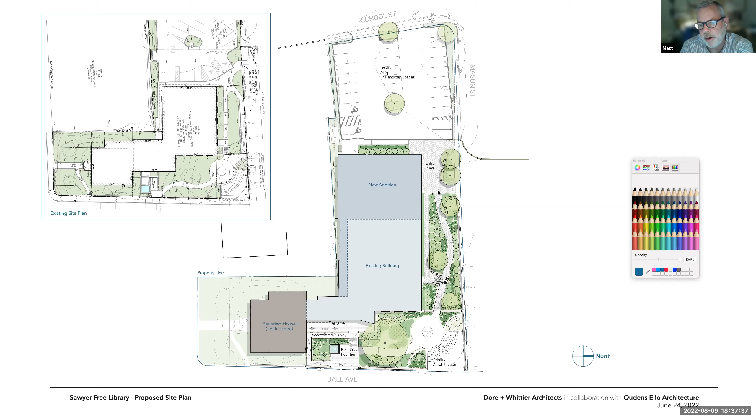What we're proposing is that we pick up this winding path that takes you from the plaza down to the amphitheater, through the north garden and sloping down. Now that we have more length to work with, we can make that an accessible walkway without guardrails down to an entry plaza at the lower level, which serves the lower entry.

Moving into the plans, as you all know, this is a 3-story building built into a sloped site. Existing plans are up in the left-hand corner, proposed plans are the larger plans on the screen. Saunders House is shaded gray because it's not part of this project. The line on the right shows where the end of the existing building is, so this is all new addition to the west. This is the existing footprint of the current building.

The way the program is distributed through the building, we have community program and staff primarily down at this level. That includes an entrance from parking, a covered entrance from parking to a lower lobby, a community meeting room of about 110 seats, flexible space with stacked chairs so you could put them away, put out tables, reconfigure the room. We have an operable partition which will allow it to divide into 2 separate program rooms.

Facilities appropriately sized for the library and for that function.

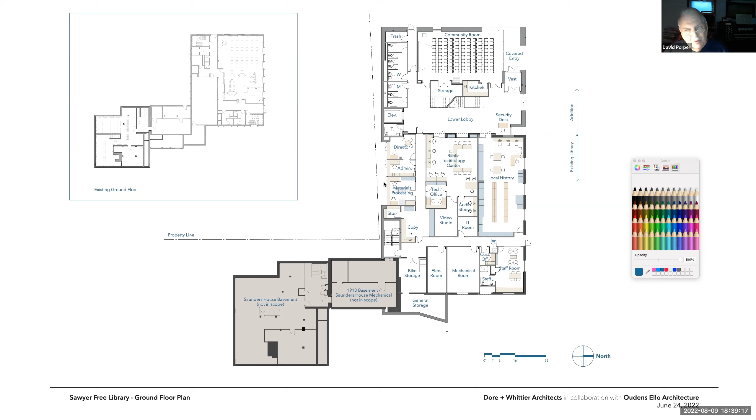Staff space, we don't have to go through much about that since we have no jurisdiction over the inside. Got it, okay, thank you. If you talk about the inside because of something that's going to happen outside, that makes sense. But otherwise we don't need to know about what goes on inside. Understood, thanks for the clarification.

I'll go a little more quickly through the plans. I do think it's important to note that this shaded blue area is intended to be accessed off hours, so we can close down the entire library with the exception of this lower level. That means the community room, lower lobby, and restrooms and support spaces can all be accessed off hours when the library is closed. It builds in flexibility in terms of how the community can use this building.

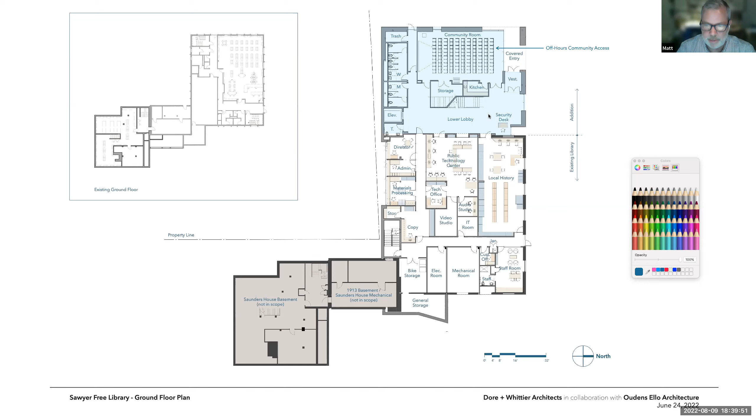This is the main level, the Dale Avenue entrance. As I mentioned, there's now a straight entrance in from Dale Avenue, straight up the steps to a covered porch and straight into the building. The existing condition is more meandering: up steps, into a porch, turn right into a vestibule, turn left to get into the library. So this is a more clear, direct entry from Dale Avenue. We've also opened up the corner so that it's more visible.

The 1913 wing, which was a stack wing added to the Saunders House, is converted to a gallery. We're relocating the gallery that was at the entrance into this space for an expanded gallery area, continuing to use that as a connector between the library and Saunders House.

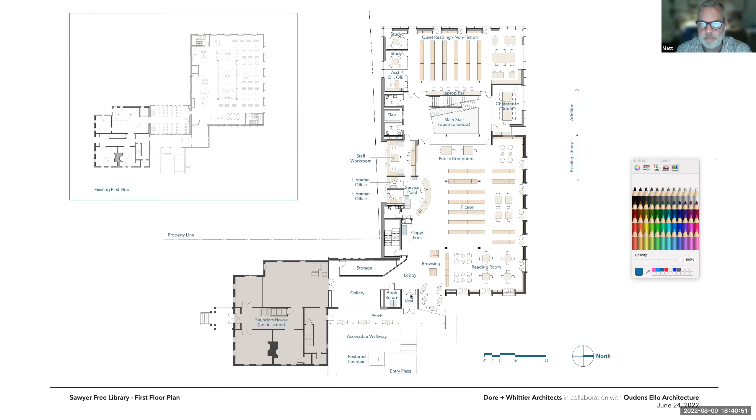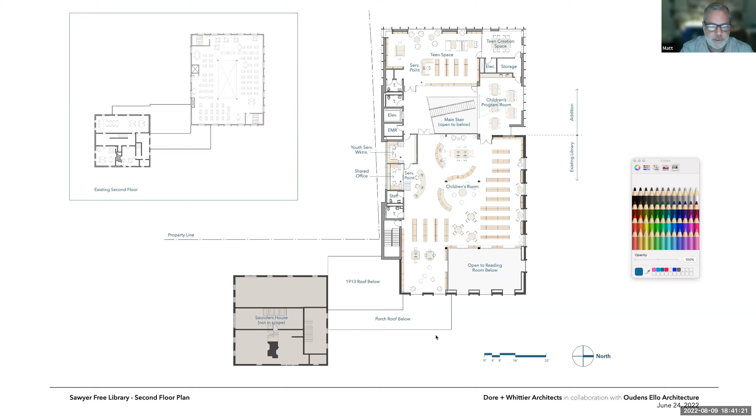This floor is where all of the adult collection and adult programs are, and then there's a third floor which houses the children's room and the teen space. One thing to note is that we've filled in the central hole in the top floor plate, and we've opened up the floor plate at the corner. We've eliminated the 2 fire stairs, so we've made great efforts to make the front of the building more open and visible from the street, and from the library out to the street, in keeping with the importance of this as an important public building.

This is the roof. The lighter blue is the existing roof, so we're maintaining the existing hipped roof of the Manel building. This is the roof of the 1913 wing. We are putting on a new porch, which you'll see in the elevations. And this is the footprint of the addition. It's a flat roof, and we are planning on solar panels wherever we can manage to get them. We have some rooftop equipment, and there's a light monitor over the central atrium which brings in natural light.

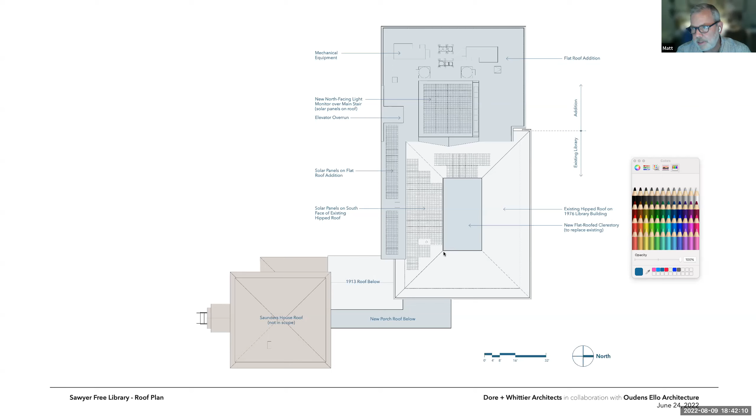In terms of the Manel roof, the one modification we're making is replacing the existing lantern with a new lantern that has more glass in it, so that it actually brings more natural light into the building.

So now we can take a look at some exterior views. This is pairing a proposed view with the existing view, showing the view from Dale Avenue. I'll point out what I was just mentioning: the light monitor on the Manel building is now replaced. It's the same height, but instead of a hipped roof, it has a flat roof, which allows us to increase the amount of glass and get more natural light into the building.

One of the things we're trying to do is bring in as much natural light as we can to reduce the dependency on artificial lighting. As you can see, we're maintaining the 1913 building. We are opening up the front of it with a larger glazed opening, replacing the windows that were in between the stacks. We are extending the porch all the way across the building, and we're opening up what was a more solid brick corner in the 1976 building with more glass, to make that entrance more open, more welcoming, and more clear in terms of patron wayfinding.

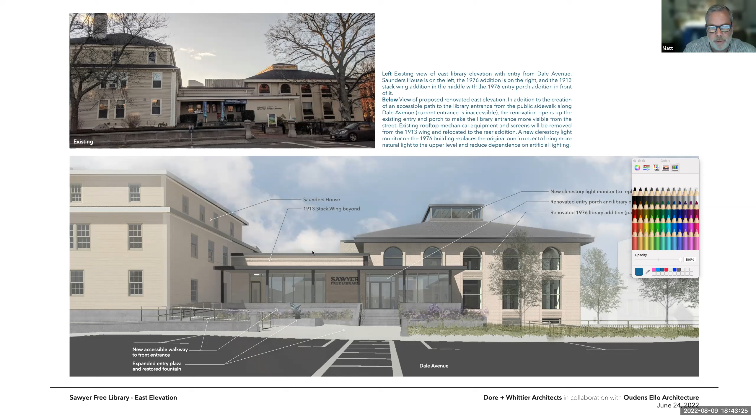One last thing to point out about this view is that we've made efforts to get rid of all the mechanical equipment that's currently sitting on top of the 1913 wing, which you can see in the photograph, plus this screen that you see here. So we've eliminated that and moved it to the back of the building, getting it away from this more important view and putting it on the flat roof of the addition.

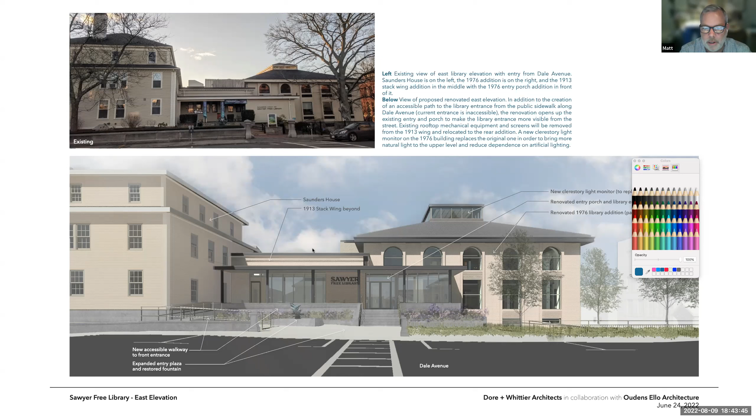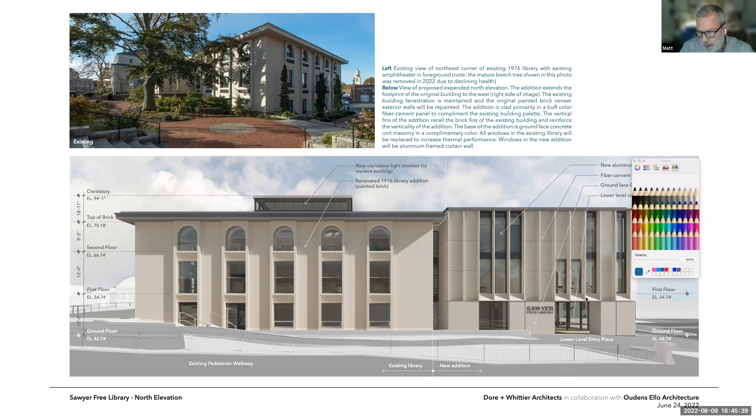In terms of the addition, it's again 3 stories. The materials are a combination of ground face CMU at the base, intended to pick up the masonry scale of the painted brick in the Manel building. The upper 2 stories are a fiber-cement panel that uses this expressed vertical fin, picking up the vertical language of the projected brick fins on the Manel building, but reinterpreted in a new way, creating a comparable scale with stacked openings and a kind of cadence around the facade similar to the Manel building, but reinterpreted for the new addition. You can see here the covered entry from the lower level entry plaza.

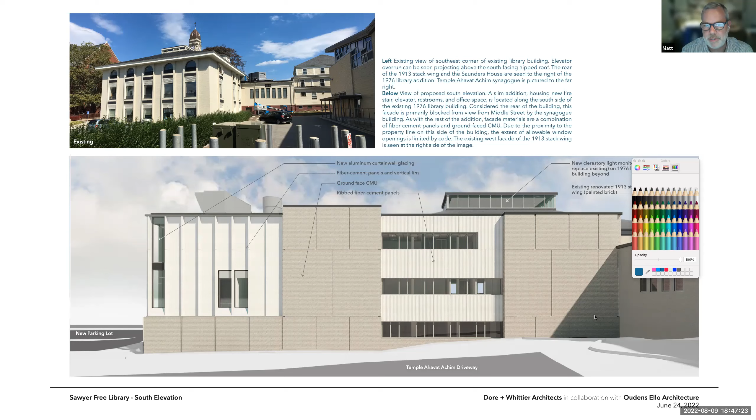The reason the facade on this side is predominantly blank is for 2 reasons. One, it houses a new elevator, fire stairs, bathrooms, etc. A lot of the things making this building work are located along this side. The other thing is, because of its proximity to the property line, we're extremely limited in terms of the number of openings we can have based on code. So we're restricted in openings, and we have a lot of solid elements on this side, and that's part of why it has a different character than the other sides, where we're trying to maintain as much glass, transparency, visibility, and natural light as we could.

Just a quick note about the materials. Again, the base of the building is intended to be ground face CMU. We're looking at a light colored CMU that would be compatible with the painted brick on the Manel building. The upper portion is the material you see at the bottom of the screen, a fiber cement panel. We're looking at a combination of smooth and this corrugated panel you see in the middle, in a buff color that picks up the general tone of the existing building.

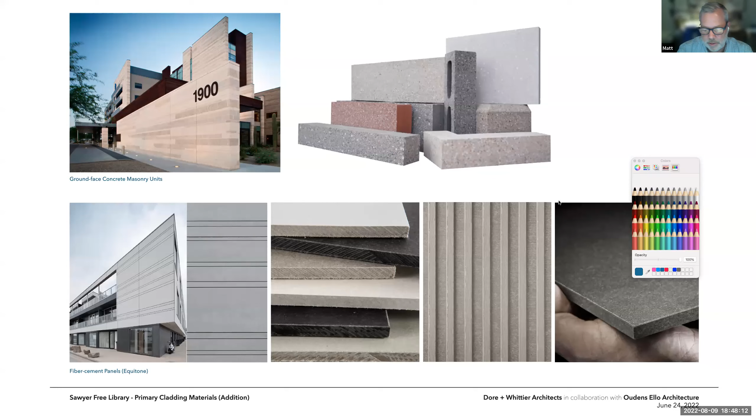We've pretty much seen what we need to see. Members, do you have any particular questions about one of the views that were shown that you'd like to see again?

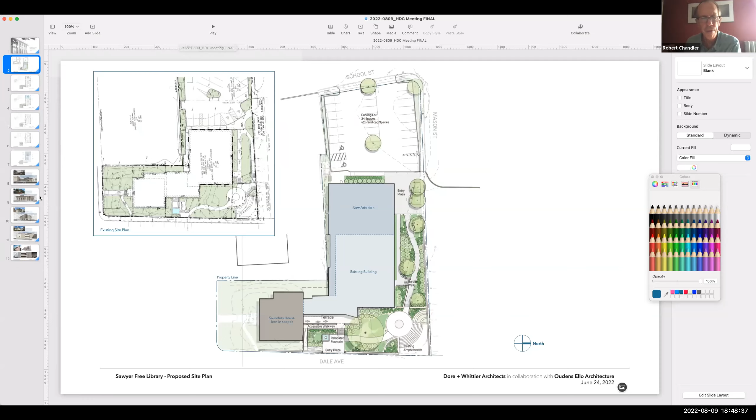Or, Matt, could you put the Dale Ave facade or elevation up? That's the most emblematic.

Thanks, I think it's really very nice. I think I do too. It's really improving and maintaining the inherent characteristics of the Manel building, but improving it in ways that will make it a much better building, and a much more open, effective public face of the library to the city.

Yeah, I agree with you, Rob. I think you've done a great job. Thank you. David? Any other comments?

David, yes, it's Ollie. Could you bring up the back, what you call the back side of the building? Yes, along that side, if you look at the top small picture, you'll see that there are 3 Monell windows that are being eliminated. And that's what we see primarily from the temple.

They consider it their backside, and that side of our building is what is used most. That's the door that's used most, it's the entryway that's used most, and we have most activities that are outdoors, which we have a lot of in that area. So we're losing some architectural detail, 3 Monell windows to be exact, 2 on the right side and 1 on the left side. But it's being, the building that's being extended out.

It would be nice to actually have 4 Monell type frames of windows put back in the design. They don't necessarily have to be fully functional from my perspective. If you go over and look at the Cape Ann Museum and see their Monell windows, they have them blocked pretty much for exhibit purposes in various galleries. So it wouldn't necessarily have to be a fully functioning glass window. It could be a framed, faux window, if you want to call it that, of the Monell design put back in, and have the image of the glass and whatnot in place.

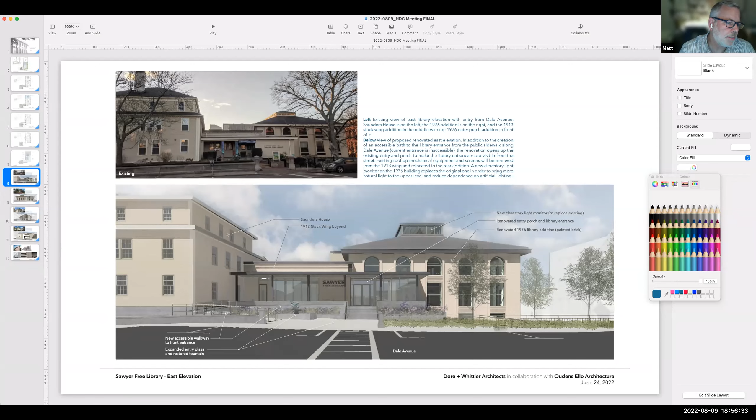In terms of the south facade, this is something we're continuing to study, and I think there's perhaps a little room for modification. However, looking at the site plan again, you can see the property line here on the left and our building footprint here. We've added a small amount, but that bit of footprint does quite a bit for us in terms of accommodating the elevator, fire stair, bathrooms, etc. The reason we're building there is that the main priority was to maintain two facades—the Dale Avenue facade and this north facade. We expanded as far west as we could; any further expansion would have limited the parking lot. We're already about as tight as we can get, and we've reached a point where we have support from the city and from the MBLC.

But any further expansion west would really put the parking lot in jeopardy, so we feel there's really no alternative but to have this bit of expansion on the south side. We're at the closest point here, at the intersection between the property line along the west side of Saunders House and the south property line of this larger parcel. It angles away from the building, so by the time you get to this end we're further away than we are here. We've stepped the building in here to allow us to get more fenestration in that area.

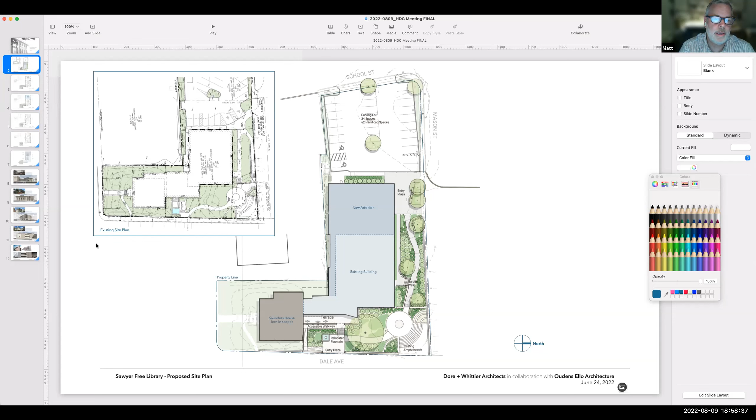I think increasing the number of windows is probably not a realistic expectation, but we can look at the deployment of those windows. Currently they're organized in a kind of continuous ribbon in this central portion. We can look at recalibrating that so we're doing stacked windows in a way that's more appealing.

In terms of replicating the arched windows, we generally work with a lot of historic properties and try to adhere to the Secretary of Interior standards, which say you need to make a clear distinction between a historic artifact and a new addition. So trying to create an arched window motif on something that's clearly a different building from a different time doesn't, to us as designers, feel quite like the right thing.

This addition, I don't think, will limit the activities that the temple has in the rear of their property. It doesn't encroach on their property and shouldn't limit that in any way. In fact, I wonder if this could provide a canvas for the temple that might be useful for projected images or that type of thing.

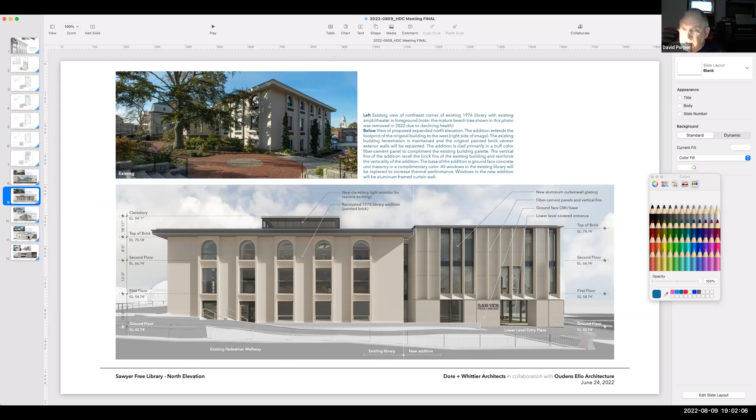Thanks everyone, would you mind going back to that view that faces the temple? Thanks. I think that sounds like a nice idea, looking at the concept that you have wrapping around the whole addition. And I've seen the work you guys have on your website, I know you do beautiful buildings. I'm sure there's a solution that can be applied to this facade. I think the idea of looking at that central window piece and how that connects is nice.

I also just think these are very large, tall, big CMU walls that are going to be right up against the property line. So while you're correct that it doesn't impede the actual space, it's not coming over onto the temple property in terms of the actual square footage that we have back there, that doesn't change, but the feel of it really does change with these large CMU, like monolithic facades. It really doesn't have the same character and feel as it does currently.

And I agree with you about not replicating historic features of the existing building, but I just think that there's maybe more that can be done on this facade, not only in terms of that central window piece, but also in terms of the two very monolithic facades as well.

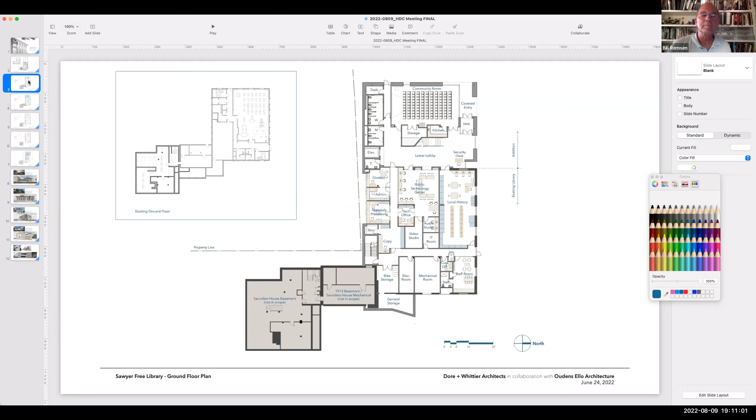Okay, great. Okay, now here's my question to you. There is a door from the 1913 basement that goes out into this walkway, which goes from the 1913 basement down to the parking lot. And that doorway, a steel doorway, is how you get into the mechanical space in the 1913 basement, which is where the boiler and hot water heater and stuff is for Saunders House. The only other way to get there, as far as I know—well, let's just say that's the practical way to get to the mechanical space. And I'm concerned that deleting that doorway will possibly cause a problem.

And in your 2019 design, you had quite a different arrangement of the mechanical room from the new library, which was up against the 1913 basement, and there was a way to get through from one to the other. Also, the fire stair went out directly onto the sidewalk there, the walkway. It seems to me that by pushing into the walkway, you've eliminated the access to the basement of the 1913 wing, and also made it so—where does the person who comes down this fire stair go to get out in case the building's on fire?

Bill, the door isn't actually showing up in this plan, but I believe the plan is that there's a door, with a few steps up to it at this end, so there's a way to egress out onto the library property. It doesn't show up here. Let me see if it shows up on the first floor plan. It doesn't. I believe the intent was that a couple of steps up would get you to a door, so we would still exit here.

In terms of the 1913 wing, you mentioned the 2019 plan. At that time it had been our intention to remove the 1913 wing altogether, including the basement, and reconfigure this whole area. We've since moved away from that, and the decision was made to keep the 1913 building to the greatest extent possible, so we're now living with that existing condition.

There is currently a way to get into that basement from inside the Saunders house. The Saunders house, including the basement of the 1913 wing which houses the Saunders house mechanical, is not in our scope and is going to be renovated under a different project by a different architect. If there are any access issues, I'd think that could be addressed as part of that renovation project. But the intention is not to have a connection between the library building and the basement of the 1913 wing, which is at a different level than the lower floor of the library.

I understand what you're saying, but I still think you're eliminating a potential fire exit from the 1913 part, and also the service access. I also think the emergency exit from that fire stair, instead of exiting onto a sidewalk, would be exiting onto a grassy hill going uphill away from the door. I'm not sure how that would be received by the fire marshal.

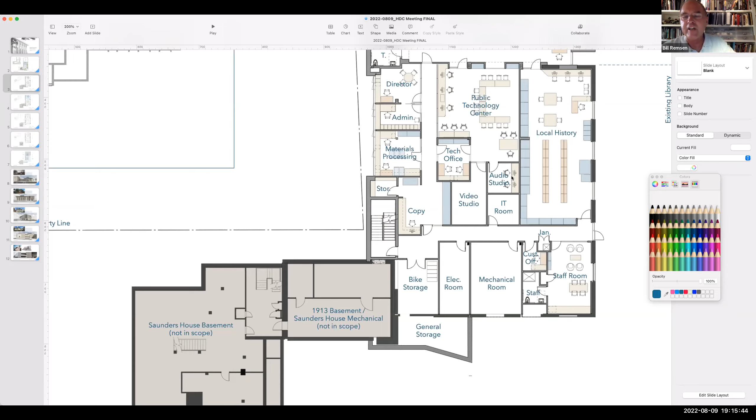Bill, are these things really in the Historic District Commission's purview? I know you're leading up to something else, but I think this is an aesthetic exterior issue because we're potentially changing the outside, and it's also changing the function of the adjacent part of the library, the Saunders house. So I think it's appropriate to consider that what we're really talking about is the southern extension of the building, and what the impact of that is in terms of not only egress and fire safety, but also aesthetics, as people have already mentioned.

I do have a couple of other questions about the materials you're proposing. Why not use brick instead of concrete block?

Well, we actually looked at brick. The switch to concrete block was partly made as a value decision, frankly. A number of years have passed since we started this project, and construction isn't getting any less expensive. With every year that goes by, we're facing escalation, and we've been trying to combat that in a way that doesn't compromise the scope of the project. So we've made some value decisions all through the project — that was one. That's why we switched from brick to CMU; it was a little bit less expensive.

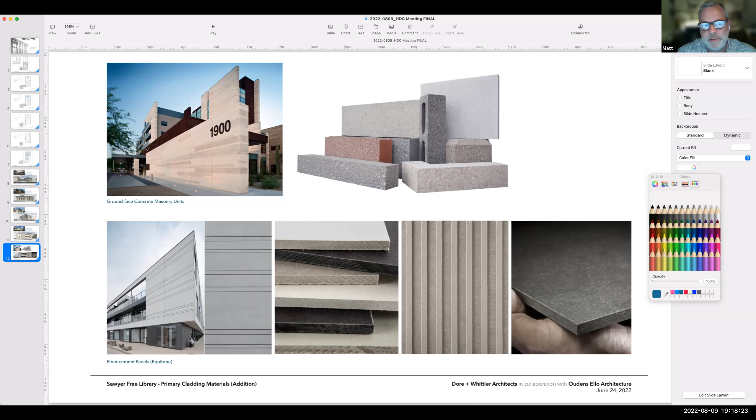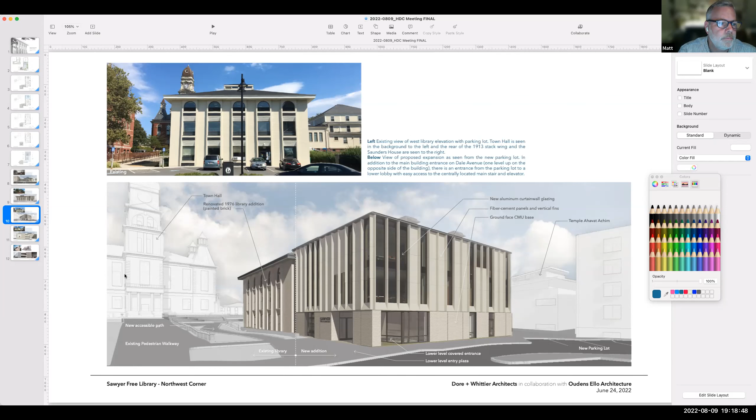Bill, this is a ground face CMU building. Now, granted, I'm not saying this is the type of building we're proposing, but I think it comes down to how it's used. Yes, it's used on a lot of firehouses and mediocre public buildings, but it can be used well and be a handsome material if handled properly. We're panelizing it to create reveals — we'll actually have a shadow line there that you can see in this elevation, and I think it shows up here as well. So the way we're handling that material is a bit different than what you're thinking about. Yes, I would hope.

Can you hold up that facade there, the north elevation? You don't happen to have your 2019 elevation in hand, do you? I don't have it available right now.

I do suggest people look at it. That elevation seemed a lot nicer.

There's a technical term, but to me, aesthetically, your addition had a masonry base, and the floor lines were identified, and the eave and soffit line were identified, and mostly it was a glass box that went on the west side of the building. I thought that aesthetically that was a good decision, and it seems you've backed off from that, and I suspect for financial reasons, because it was probably more expensive.

No, it wasn't financial, Bill. It was actually, as we got into the development of the project and the design, there were certain realities we had to deal with. One was structural—we needed some shear in that addition.

So we needed some solid exterior walls. We also, when we got into the reality of laying out the program more carefully and doing shelving counts, we needed more perimeter shelving. We had program that needed to be on an exterior wall that did not really want windows. And so, based on those kinds of developments in the natural course of the design, we had to move away from what was really just a diagram of an all-glass box sitting on a base.

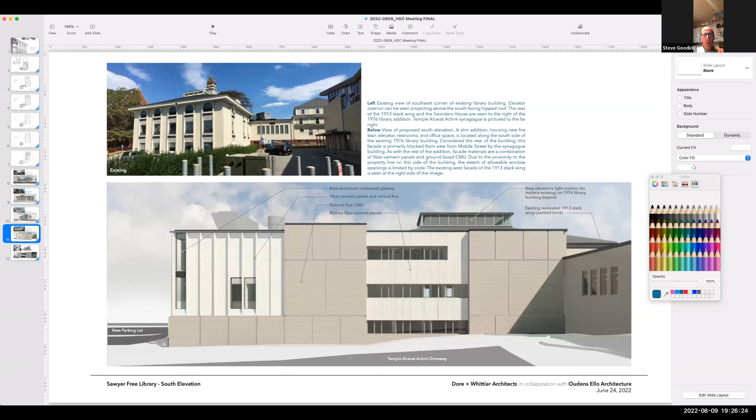Hey Arlie, can I ask you a question? Arlie, yes, can you hear me okay? Yes, Steve. Okay, can I ask a question? Are you and your group at the temple, for lack of a better term, offended by both flat monolithic walls? Or could you live with the one on the left if the one on the right was turned back into more of a panel look?

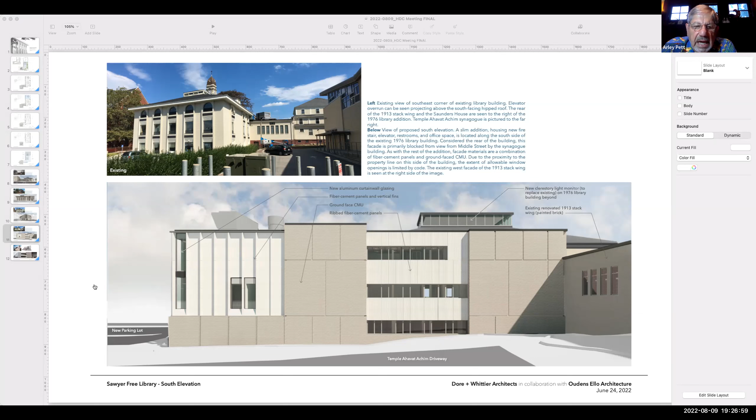So would a possible compromise be if the Manel building was to maintain more of its original look, and the new addition was to be separate from the Manel building? Would that be something your organization might consider? Yeah, that would be an improvement.

I'm speaking more from myself and what I've been concerned about. What I'm saying is that I can see you could reframe the Monel style windows where the two gray panels are on this side. You could put the two back on the east side, just framing it, and you can put faux windows by putting something behind the glass so it looks like a real window. Then you could put two there, and if you go on the west side, which is part of the new extension, there'd be room to put two more there. We get one now; two more I think would help balance it out a lot better.

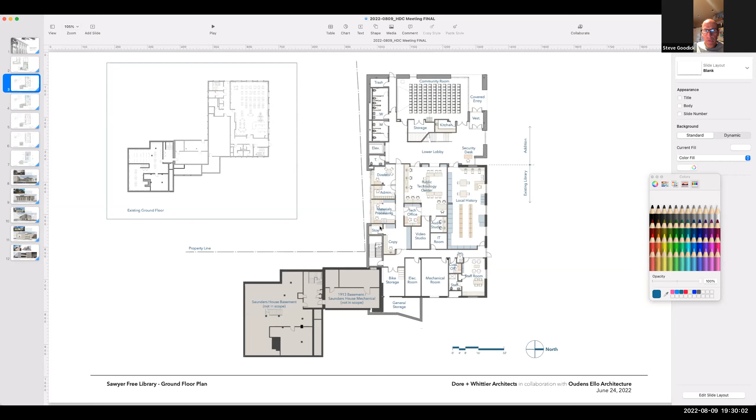On this floor, it is a storage room. On the next floor, it's a bathroom for the staff. And on the upper floor, it's the family restroom for the children's room. Okay, so it's a bathroom on 2 levels, and a storage room in the basement because we didn't need a bathroom there. Got it, okay.

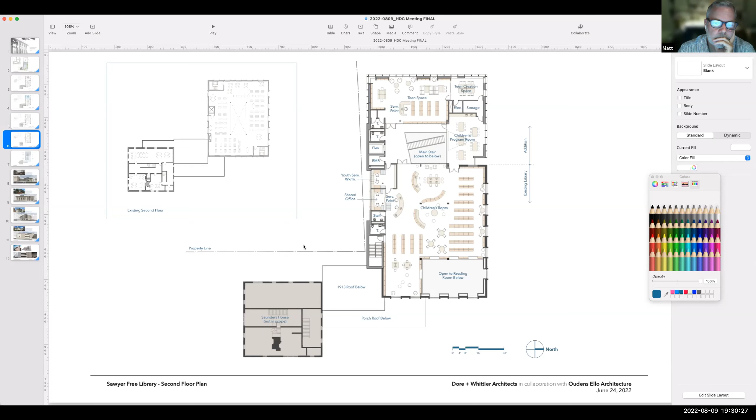My sense is we're probably not going to reach a conclusion here tonight, but maybe we can focus a little on the fenestration on the south elevation. Is it reasonable? Maybe internally we can kick around some ideas on the larger, non-fenestrated portions there. But other than that south elevation, does anybody else have anything? It seems like most of the discussion has been focused on the temple elevation, and if that's the case, I want to make sure we're focusing our attention on that.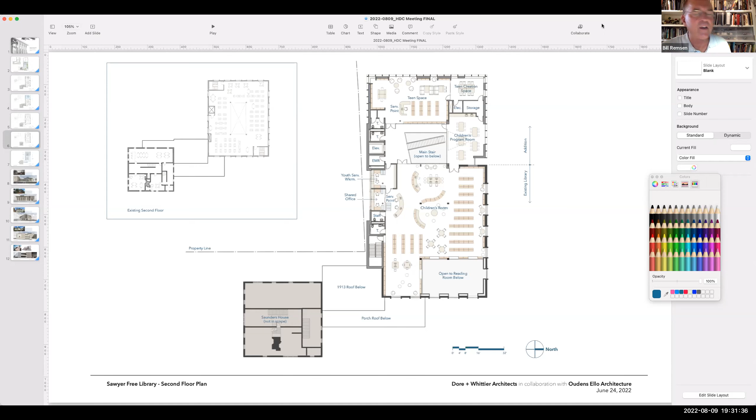I have a question. Can we go back to the south elevation, please? Okay, here's my question. You mentioned you were taking the HVAC equipment off the roof of the 1913 building, which in this elevation you have, but you've put it over on the flat roof of the addition.

I have to admit, it's always an architectural problem how you hide the necessary compressors and various other mechanical bits and pieces up on a roof. Several thoughts occurred to me. If you extended the hip roof, for example, you might be able to create a wall to hide the mechanical equipment. I know you've got solar panels and also a skylight up there, but what were your thoughts about trying to hide the mechanical equipment on the roof?

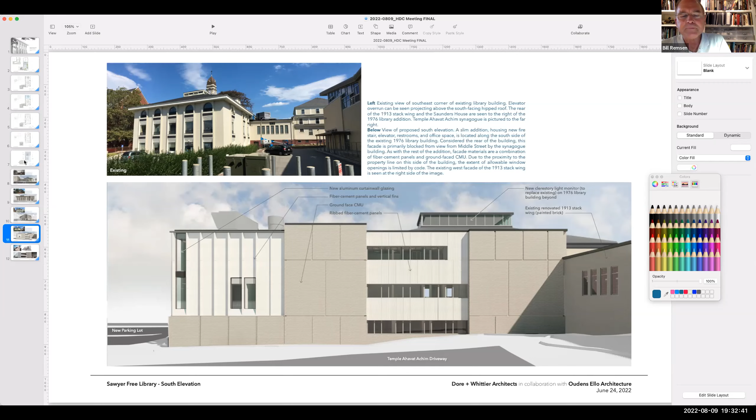That's visible from the adjacent buildings, I think, quite visible. Well, it's visible from the back of the building. And what we were trying to do was prioritize the Manel building and the view from Dale Avenue.

And the view along this most prominent corner, the northeast corner. So getting it off of the 1913 building also makes the connector's scale come down. Thinking of this as a connector between two larger buildings, having the scale smaller makes sense visually. That was part of the incentive, but it was also just trying to get rid of equipment that was gumming up the works here.

In terms of the view from the most prominent street, as a compromise, we thought we'd locate it on the addition, which is furthest from the public way. Granted, you'll be able to see it from certain buildings, but we were trying to take it out of visual play to the greatest extent possible.

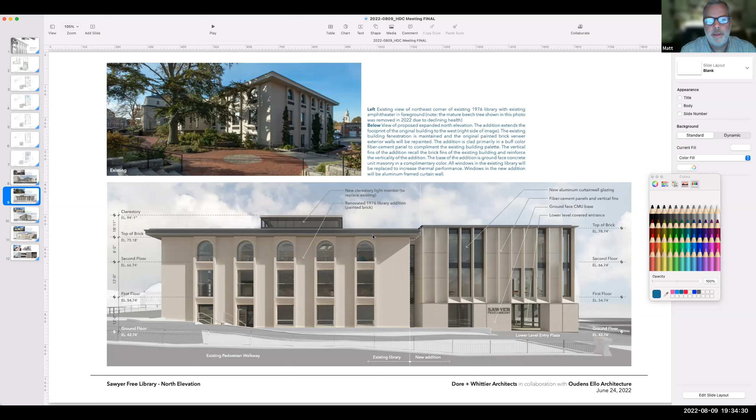In terms of the hipped roof, you can't really see it in this view since you're too low, but one thing to mention is that the hip roof, where it meets the exterior wall, is less than 8 feet above the floor. At one point we considered tucking the addition in under the eave of the building, but it wasn't practical for making a connection between the existing building and the addition.

You can even see here the roof of the addition has to come up and overlap the back edge of the hip. We're trying to maintain the corner of the hip, which is why we have that reveal between the addition and the existing building. So there really isn't a way to use the hip roof to extend that far out.

Okay. Like I said, we put it in a place where we hoped it was the least offensive. Like you say, it's never an easy thing to deal with. I don't have any problem with that, really.

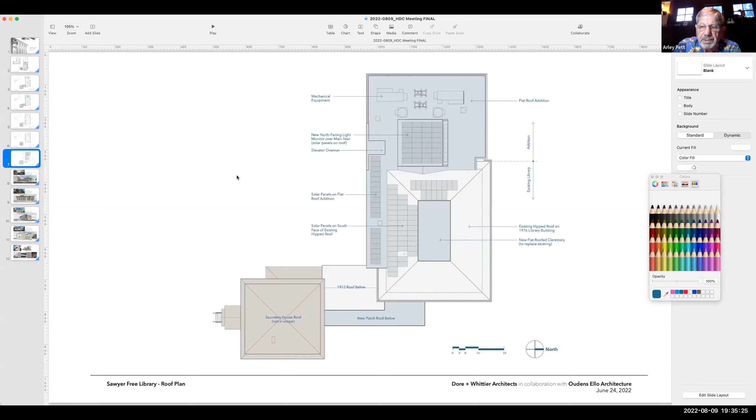I can add that the connection where you're taking the HVAC off the roof and moving it back to the new part of the building—whenever it was maintained or upgraded, they had to come into the temple yard and bring in cranes to work on it. So it wasn't a very practical spot for it anyway. I think it will be a lot more serviceable from the back.

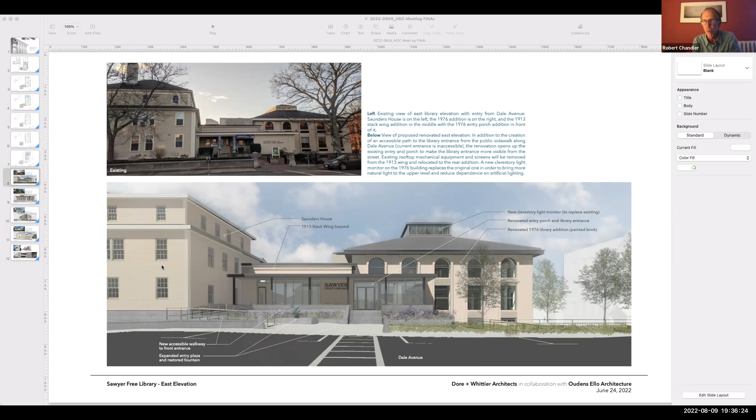Brad, back to your question, what's the overall view of the commission? I can only speak for myself, but my sense is most of it is working very well. It really improves the relationship between the library services and Dale Ave, which I think of as the front of the building. The character of the addition is quite nice—it respectfully relates to the Manel addition without copying it. It just feels like the good things in the building fall apart a bit on the south side against the temple. I'm sure you can find a strategy, largely within the vocabulary you have, to make that part of the building work as well as I believe the rest of the building does.

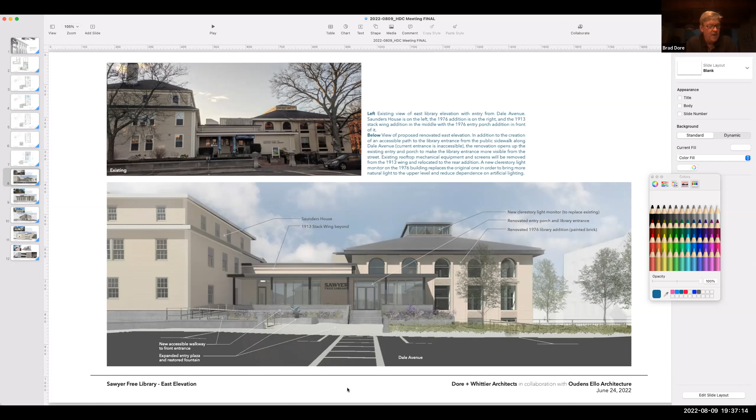Does that seem reasonable to everyone? I would also like you to do me the favor of reconsidering brick instead of concrete block. So Bill, I would be happy to do that.

I think this is really not in the hands of the designers right now, given the cost considerations. I would think what we can do is come and take a look and try to get a sense of, on a unit price basis, what that differential is. I would be interested in that number. Yeah, I think that's fair.

At the end of the day, this is really one of the most public and prominent buildings in Gloucester. More people will go through this. It really needs to be, it'll be a landmark essentially. And so I think we really need to make it not only do all the functions, which I think your design is working well for, but we have to make it look like something people in Gloucester can be proud of, and it'll last for many generations.

So I think we have one chance to get it right. That's what I'm hoping we can fine tune the design a little bit. Yeah, I think everybody shares that goal.